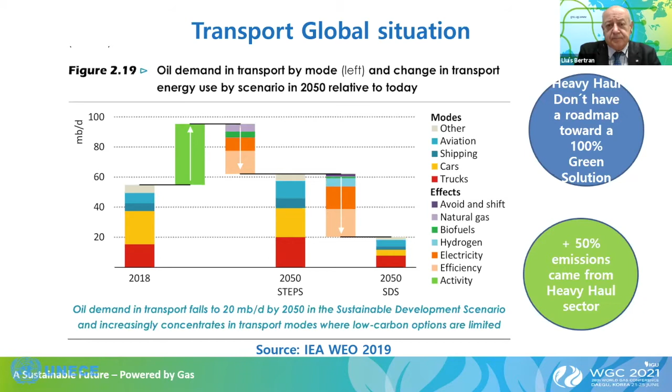Click again. So on the left, we talked about trucks, but also in the marine sector we are using one of the most polluting fuels, heavy fuel oil. So here the gains from switching this fuel to natural gas are very important and very great. On the right you can see the accumulated emissions related to pollutants in the air, a picture from 2015 when the Paris Agreement was signed, and you can see that what we have accumulated in our atmosphere comes almost entirely from other fuels.

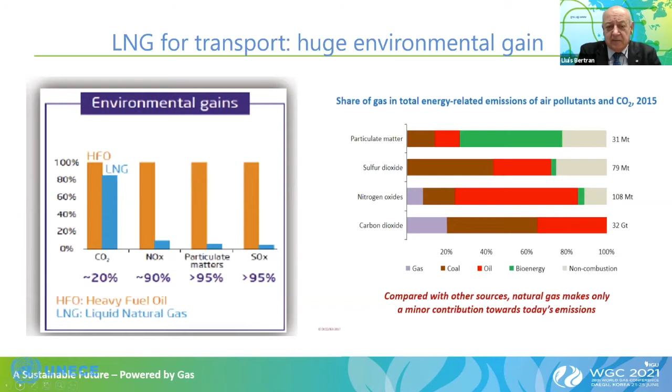So in marine transportation, you know that we have these ECAs as areas free of pollutants, which are currently in the North Sea, the Baltic area, and North America. But these areas will be extended. It has not been decided yet, but probably the next area will be the Mediterranean. And that is because, as I said, heavy fuel is really one of the most polluting fuels that we can use, even though the Mediterranean is still not declared an ECA area.

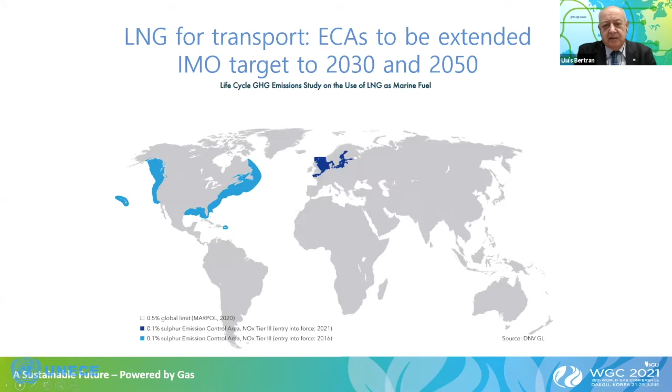We also have the International Maritime Organization targets for reducing pollutants, and setting up these targets for 2030 and 2050 is inviting all the shipbuilders to provide solutions today that can meet the 2030 target. Investments in shipping take around 20-25 years. So what we will have in 2030 and likely in 2050 needs to be done now. Move on to the next slide, please.

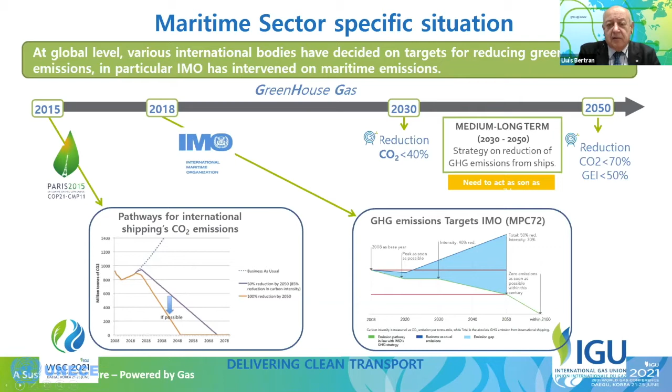A picture of what these International Maritime Organization goals mean: we cannot meet the Paris Agreement goals without having a plan. The IMO set targets of reducing CO2 emissions by more than 40% by 2030 and around 70% in 2050. To make that possible, different technologies can compete, but gas is now available as the fuel of choice for new-build ships that will be crossing the seas in the coming years. Next slide, please.

Among different technologies, it is demonstrated that LNG is nowadays a competitive and widely available fuel around the world for reducing marine transportation emissions and improving the air quality in these areas. It's commercially viable and scalable. We can move from smaller scale to bigger ships, and it could be provided in different harbors around the world. Next slide, please.

And the infrastructure needed for that is growing and growing. Europe is taking the leadership of this growth, but nowadays there are many initiatives around the world, mostly in Asia, where marine transport is key for moving goods and food around the world, for developing this technology and the infrastructure which is needed. Next slide, please.

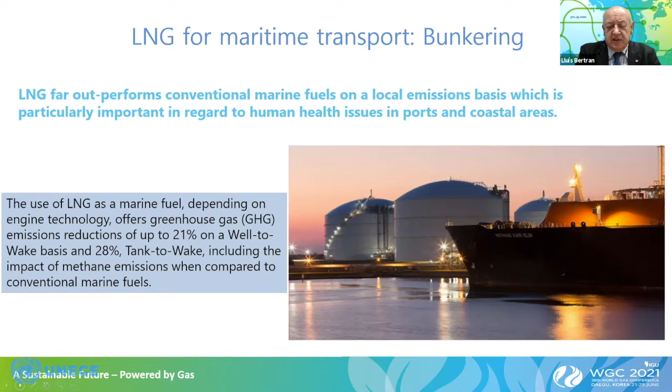Here I have very good news to tell all of you. LNG, natural gas, can come not only from natural resources, we can also have renewable resources. Here we have synthetic methane, liquefied synthetic methane, and biomethane. Both can be obtained, and the technologies are now being developed, and they could replace the normal LNG that we are using today. That makes our pathway to future decarbonization scalable, available, and with the capacity to modulate the change and the use of biomethane or synthetic methane that could replace normal natural gas.

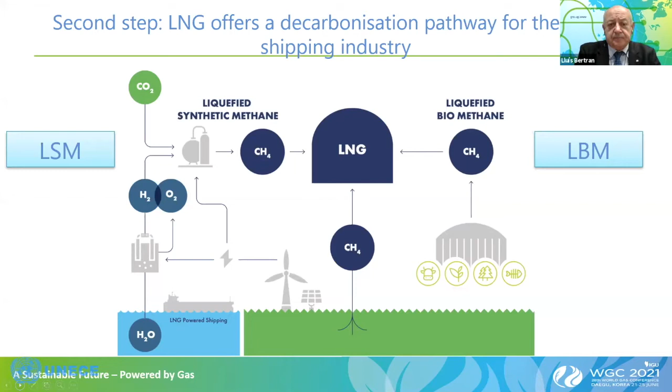And here we have also an idea on the supply of this synthetic methane and biomethane. So we can fully support and fully fuel the transportation sector with synthetic and biogas sources. And when other sectors also need to use more natural gas, not from an organic source but still renewable, we still have capacity for deploying another technology which is arriving nowadays everywhere, which is carbon capture, storage and use. So CCS and CCUS will allow the natural gas industry to continue decarbonizing after putting biomethane and synthetic methane on the road.

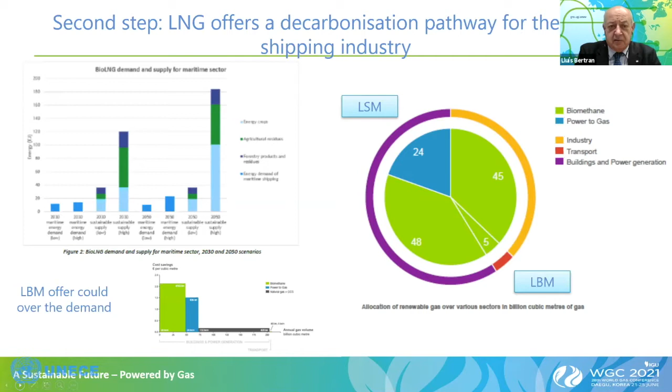So that means that we have a path for having natural gas not only as an enabler of the energy transition, but also a facilitator of the final destination of our targets. Next slide, please. Well, I will skip that. If you'd like to know a little more about what IGU is thinking, proposing and presenting on LNG activities for the marine transportation sector, you can get this report for free on the IGU webpage. And next slide, please.

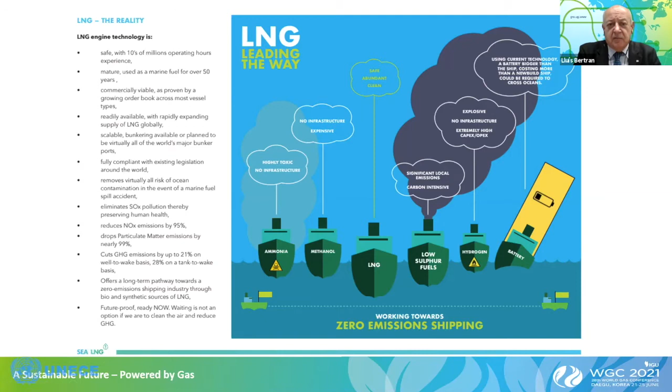Thank you, Mr. Bertran. It's very interesting, very illuminating. I think these lessons learned in marine transportation will be very applicable to road transport. And there are a few questions for you if you would like to take some of them. One is from Mr. Indrebo. I'm reading the chat, and I encourage others also to use the chat to the extent possible to ask all of our speakers directly.

The question is, as shipping seems to be growing, on road transportation, what is the interest from car manufacturers for NGV, for natural gas vehicles? Well, it's again this, because it's available today and is competitive in terms of price. We are now thinking about how we will be recovering from the economic crisis that the pandemic is creating, and we have an available fuel, scalable and possible to use today with environmental gains and economic gains from now. And now it's time for action on that.

Okay, thank you. And I have a question myself. We heard from you a lot about the lessons in maritime transport. This project at the same time deals with the use of natural gas as a fuel in road transportation. However, there is an interesting field of potential action in the future. As you probably all know, UNECE has the Inland Transport Committee that has a mandate for inland waterways, rivers in other words, and canals, rivers like the Rhine or the Danube or other navigable rivers.

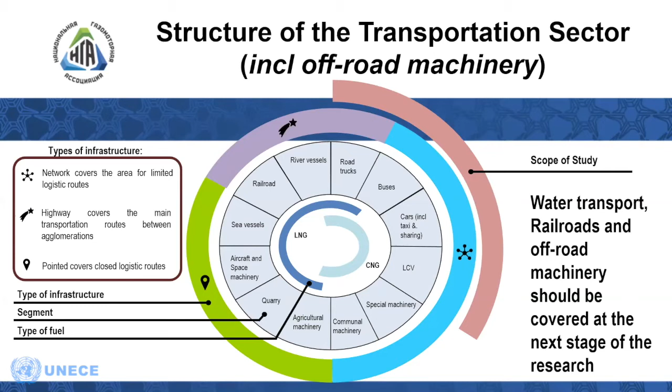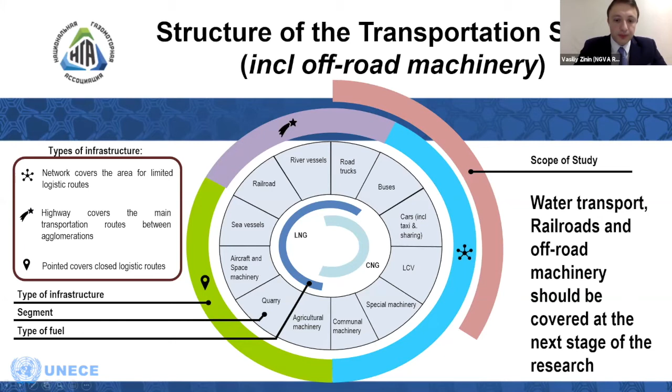Thank you, Mr. Zinin. Very informative, and thank you very much for giving us some information about the deliverables of this project. And I would like to encourage everybody to get in touch with Mr. Zinin, who is a consultant hired to help us deliver on many important deliverables of this project. Are there any questions for Mr. Zinin?

I have some questions. I sent you. You can say it because I have not received, please. Okay. Well, hi, Vasily. I hope you're fine.

Maria Rosa, thank you very much for your question. Dear colleagues, if you don't mind, I will answer in English. You know what situation we have now in Russia? We really have a great complex program for the NGV market in Russia with a lot of support from the federal government and regional government as well.

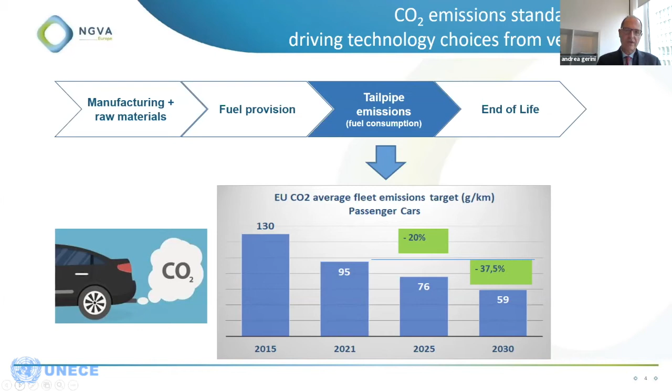If we move to the next slide, I think this is an interesting exercise made by Frontier Economics, looking at the potential we think we have when we switch from conventional fuel to battery electric vehicles. You see here on the left, 124 grams CO2 is the average value in Germany for conventional fuel, which theoretically could be completely cancelled. But when you add all the other components, the production of electricity, the CO2 impact of the infrastructure for electricity grid transmission, and the impact of vehicle production and end of life, you realize that out of these 124 grams, in reality, you save 7 grams.

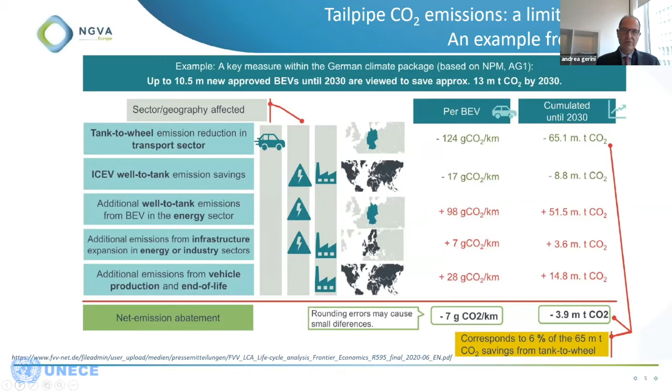So the real impact of a very huge electrification of the fleet is not leading to the expected result we could see just looking at the tailpipe emission; it's very poor. So we need to multiply solutions. And if we move to the next slide, we see the situation when we compare a C-segment vehicle, let me say a Volkswagen Golf, over a lifetime of 160,000 kilometers. We compare the emissions from petrol with CNG, and the perspective we are developing in Europe with bio-CNG, and also today's battery electric vehicle and what it could be in 2030 according to different energy mixes.

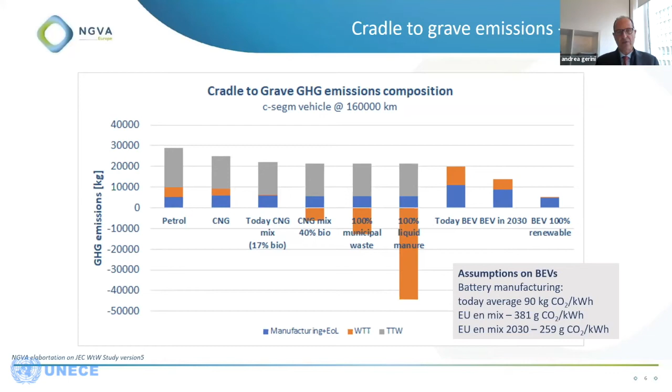So the blue part shows the weight of the manufacturing process. And here is the main issue today for battery electric vehicles. Today, battery electric vehicles emit double the CO2 due to the manufacturing process of batteries. And it's quite crazy to see that in a large sedan or big SUV, we are speaking about 100 kilowatt-hour batteries that just for their manufacturing emit approximately 9 tons of CO2 before starting to use the vehicle. So here is the question of the impact of looking at the system from a tailpipe approach rather than a more complete and overarching assessment.

If we move on to the next slide, we will see the overall result in terms of the so-called cradle-to-grave emission. And we realize that CNG is already providing a step in the right direction. And with CNG blended progressively with bio, we are able to provide the same kind of result as a battery electric vehicle at a lower cost, with a better vehicle range. So better meeting the expectations of the end user, because we have to consider them. So it's not a question of saying battery electric vehicles are bad and the rest is good. It is to really have the clever and right approach, to put the right solution in the right place.

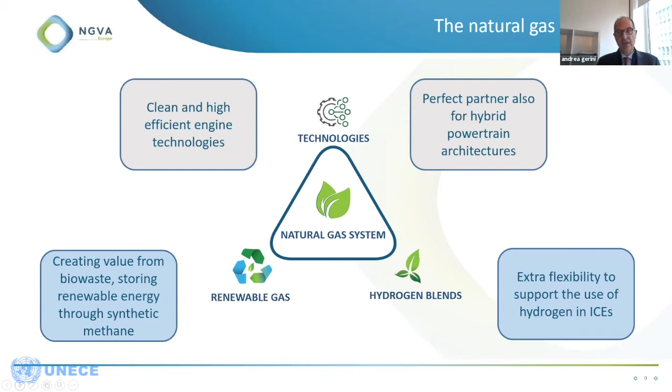Thank you very much, and happy to take your questions. Thank you, Mr. Gerini. I think this was quite interesting. You brought some important concepts. So let me ask, first of all, participants, any questions for Mr. Gerini? If not, I have actually one question.

When we started this project a year ago, we put in the project a construction we call well-to-wheel, from production to driving. And thanks to your intervention, and others were also involved, we changed this to life cycle analysis. I know your presentation said most of it, but could you summarize for us, for the sake of our participants, the key difference between well-to-wheel and life cycle analysis?

Yes, well-to-wheel is related to the utilization of the fuel, including also the production of the fuel and its distribution. So when it comes to natural gas, you look at the CO2 impact from extracting, processing, and distributing gas up to the station, including the compression of the gas up to 200 bars, or in the case of LNG, the liquefaction process and distribution. And of course, you add this to the CO2 emitted from the vehicle.

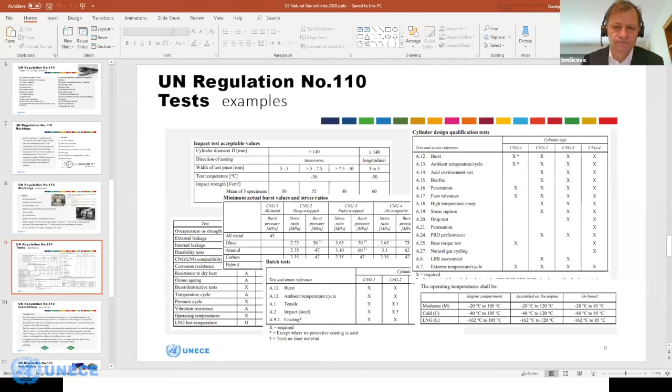Thank you so much, and thank you for inviting me to this important meeting. And please apologize for my late arrival, but I was in parallel in another meeting where I was a member of a panel and had to intervene there. So let me now go to my agenda and to my presentation.

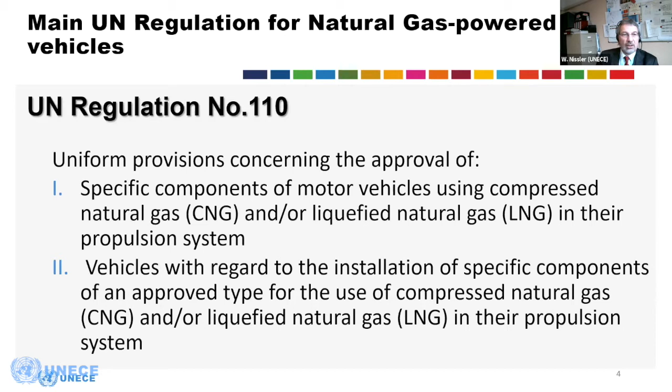Now let's move on and first look at the first part of the regulation that is dealing with the approval of the specific components, and which requirements these systems would have to meet. So we are dealing with pressures starting at the low pressure level of 20 kilopascal up to 26 megapascal. That means a pressure of 260 bar in the storage system of these vehicles with compressed natural gas. We also have to deal with very low temperatures, which is important for the liquid natural gas. So we are dealing with temperatures below minus 40 degrees Celsius.

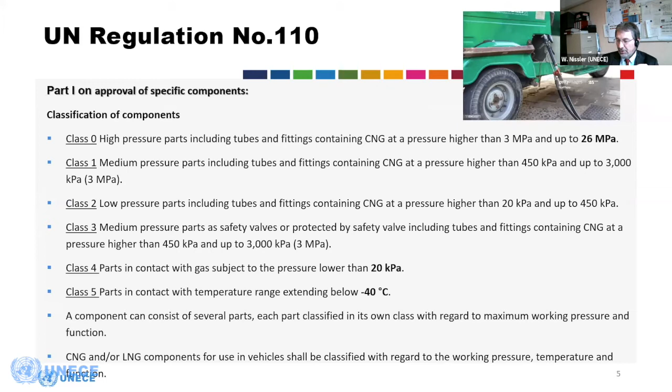Just as background information on this short image, you see the most common public transport vehicle in India, the so-called tuk-tuk, and India did an excellent step 2 years ago that all these tuk-tuks had to be retrofitted to run with compressed natural gas. So this was a huge step. And if you look at the population of vehicles in India and specifically the millions of tuk-tuks around, this switch was a huge step for the environment. Next slide, please.

This is just listing up of the specific components that are subject to individual approval, and if you count them, it's easily ending up at 26 different specific components that are covered in this regulation for individual approval.

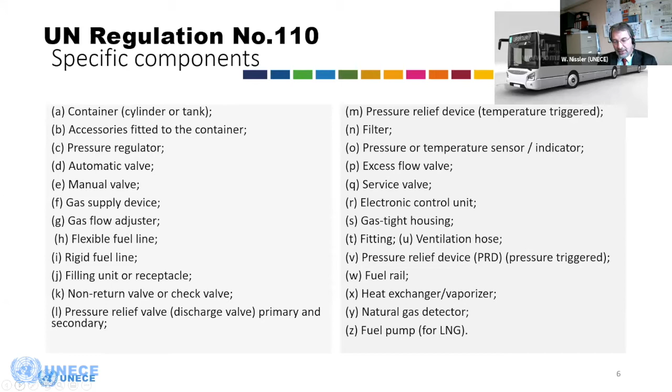The next slide, please. And therefore, all these parts will bear an individual approval mark, with specific elements on it. For example, I just put the example on the operating temperatures, where we differentiate between moderate or cold temperatures, and this will then be easily identifiable in the approval mark.

Very important also for keeping the systems safe during the life cycle of their use is that, for example, elements such as flexible hoses also bear a manufacturing date on their covering, so that those flexible hoses that have, let's say, a shorter lifespan than other parts of the vehicle can be checked whether they are still compliant with the duration of their use.

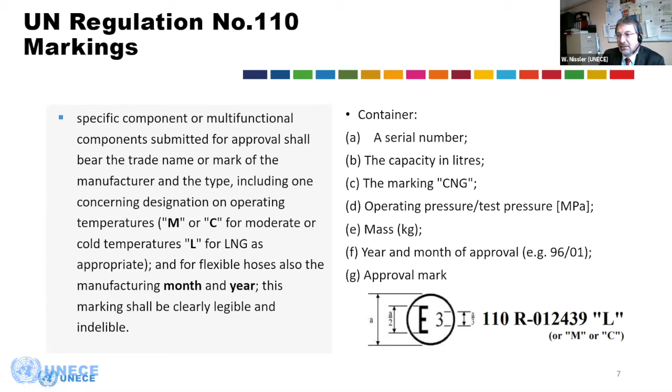Of course, very critical elements are containers and tanks, the storage media that need to have specific marking or a type plate affixed to them, and these containers and tanks need to be not only subject to a visual check during the periodic technical inspection, but also to be re-approved regarding their pressure or strength capacity, depending on their size, every 10 or every 15 years. Next slide, please.

So there are, of course, different materials that can be used for these tanks that you may find in the vehicles. So we have, starting from metal based tanks, as you can see in the image of the truck, up to, let's say, composite or wrapped materials, as you can see in the tank of the passenger car on the left image. Again, a lot of information is to be put on these approval and identification plates of the tanks.

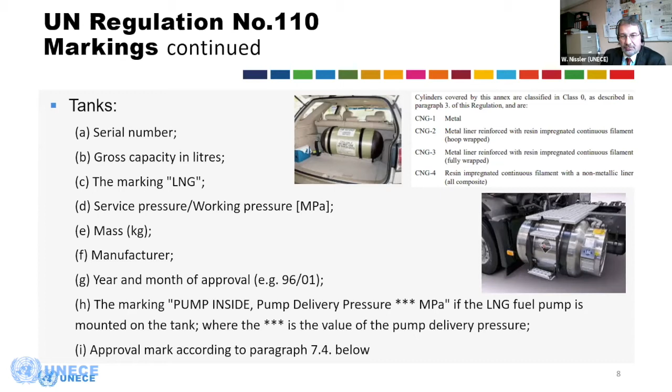Next slide, just very brief, and I don't want to go into detail. The regulation covers an extensive amount of test procedures and test requirements, and there are different matrices for the different products, showing which tests they have to comply with. And you can see that, for example, for some of the requirements, the burst tests can go up to 73 megapascal. That means 730 bar pressure that these tanks would need to cope with.

And also looking on the temperature side, operating temperatures are going down to minus 162 degrees Celsius. So there is a huge variation of tests that are specified within the regulation. Next slide, please.

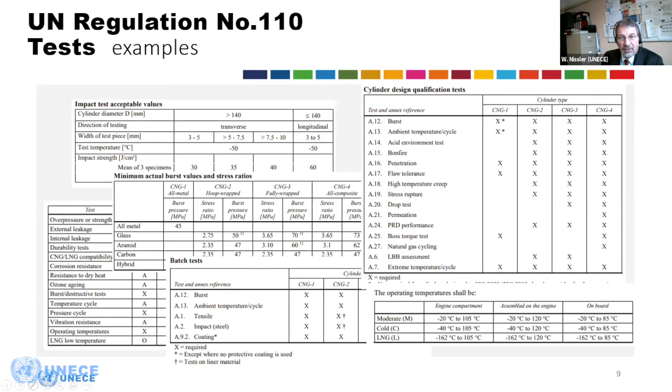So for the installation, there are some basic but very important requirements: these CNG or LNG systems of vehicles shall function in a good and safe manner at the working pressure and operating temperatures for which they have been designed and approved. And now it is also made clear why all the different components need individual approval, because one of the installation requirements is that all components of the system shall be type approved as individual parts or multifunctional parts. And of course, there are then requirements on the test of the installed system.

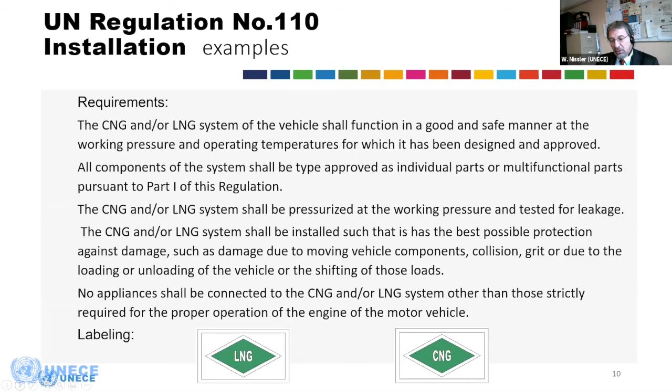And one important element is that these vehicles that have been equipped with CNG or LNG systems have the related labeling, which is very important in case the vehicle is involved in a crash, so that first rescue services know that there is some additional possible danger coming from these vehicles. Next slide, please.

The regulation also identifies the minimum parts that have to be part of an installed CNG or LNG system, and optional parts that may also be included depending on the individual system. I just wanted to put some images so you can see that from the vehicle manufacturers, for these vehicles designed to be CNG or LNG powered, all the components are already embedded in the vehicle in its design phase, and then they are very well installed and protected for crash situations.

Of course, you may also find some kits that are called CNG kits for retrofitting. These are popping up on the internet if you're looking for this. These are possible basic kits for the retrofitting of CNG systems. However, this retrofit is something that should be done by qualified workplaces, and it is not something that can be done in a do-it-yourself manner. And if you are traveling around in several countries, sometimes you assume that there is more do-it-yourself than proper installation by professionals.

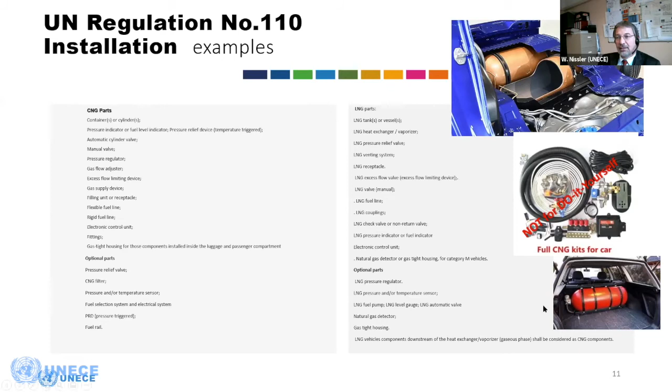Next slide, please. So there you can see, just for the installation of containers or tanks, the storage media for the compressed natural gas, that they should be designed to withstand a force comparable to an acceleration of 20 G, that means 20 times the weight of the storage media, in the direction of travel, and 8 G for the strength perpendicular to the direction of travel.

Just as some highlights, this is something that ends up having these systems installed in vehicles in a very safe manner. Of course, there would be many more elements in the regulations that could be shown, and there is, I think, a list of more than 2.5 pages with references to private standards like ISO standards, which are referenced within this regulation, therefore making these private standards mandatory

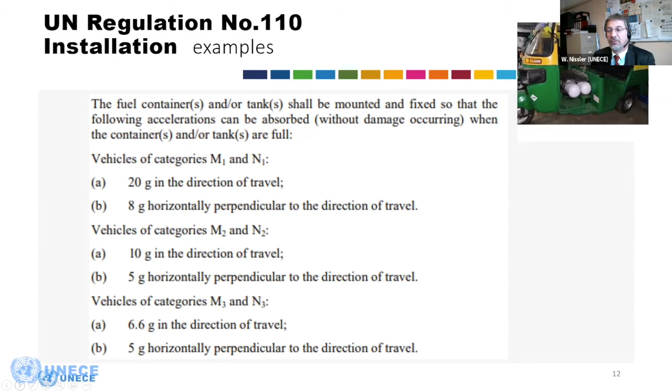via this UN regulation. And with this, I will stop here, so as not to go too much into technical detail, as it is a very technical substance, just giving you a brief look into one of our UN regulations dealing with the subject.

Thank you. Thank you, Mr. Nissler. Very, very interesting. Any questions for Mr. Nissler? If not, I have one.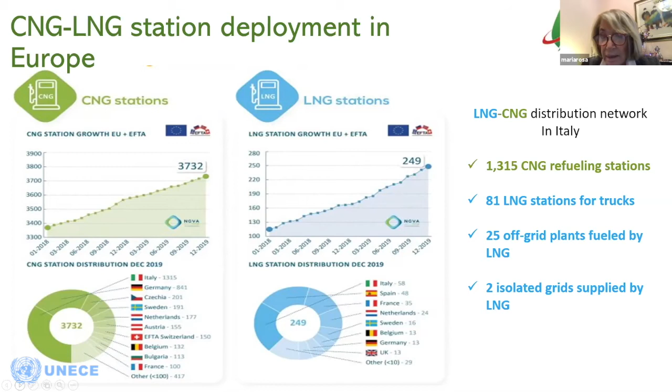bio-LNG stations. And just 2 weeks ago, at Iveco, a new truck was filled up totally with biomethane. And that has been a very big achievement. Of course, we are also looking to a mix of CNG and bio-CNG to clean up. We know that 30% bio makes 30% less CO2. So we are doing a very large project to give to the grid as much biomethane as possible.

Next slide, please. Well, Italy, as I say, has all the technologies for natural gas. We have small-scale LNG. We think that LNG is the transition for decarbonization. So we use this word, transition, and bridge to the future technology. We don't know what's going to happen. Maybe it will be hydrogen, electric. I doubt electric for heavy duty and boats, but hydrogen is coming.

So we are looking forward to make people understand, that stakeholders understand that natural gas is the best transition possibility for decarbonization. It's ready, we have all the technology, it's cheaper, and absolutely it's a technology that can stand against all the fuels like diesel or other fuels or gasoline.

So let's go. We have a micro liquefaction plant. We have gas pipelines all over. Right now, we are going to reach also Sardinia. Sardinia is the only place in Italy that had no CNG. So now with LNG, we are going to open a good grid of pipelines in Sardinia to cover it. And we want to be the hub in the Mediterranean for LNG, LNG for boats, LNG for ships.

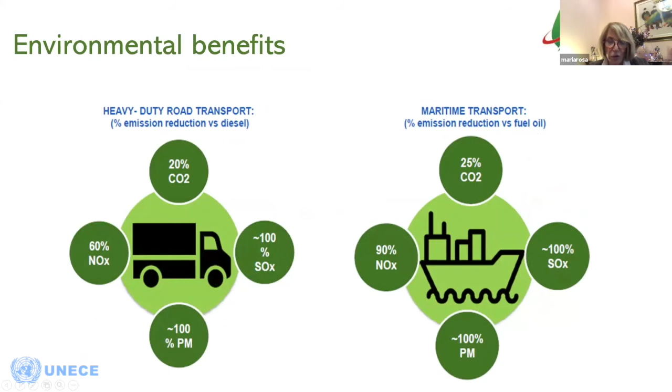I am Milanese and Venetian, and my dream is to see the Vaporetto in Venice go on CNG or LNG or bio-LNG. It's a tough job, but I'm working on that very hard. So I think that our stakeholders are working very hard to reach this point. Next slide, thank you.

So now we see the LNG uses and the potential. The main potential for LNG is heavy duty trucks, of course. The LNG consumption in 2018 has been 60 kilotons per year, with a growth of plus 100%. The expected demand is going to 800 by 2030.

We show the potential. Okay, also the maritime transport is growing very much. And Italy had the first boat on biomethane and bio-LNG. We have LNG for residential and industrial use. And we're working also on that to have a growth. Thank you very much. Next slide.

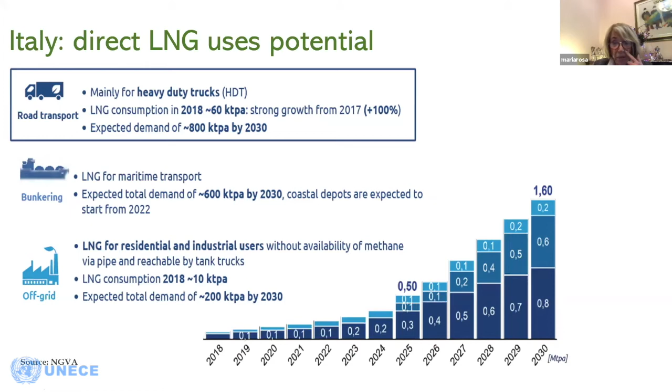Next slides. You see the other uses of natural gas, of LNG, and that's what we are mainly working on, because NGV Italy does not yet have the technology for big ships, but we have the technology for this kind of boats or this kind of ships. And we are already working in countries to have dual fuel, that means diesel CNG or diesel LNG, or changing the engine into Otto cycle, totally all LNG.

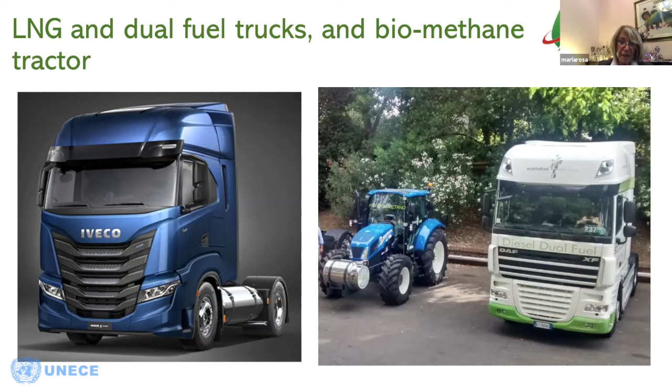Well, we're working also on trains. We are actually working with NAM on technology for trains. And in 2 years' time the first samples would be ready. And it's going to be the train that does the circle here around Lombardia and Veneto. And we think that after the LNG trains, there will be the hydrogen trains. But this is a technology that my associate members are carrying on.

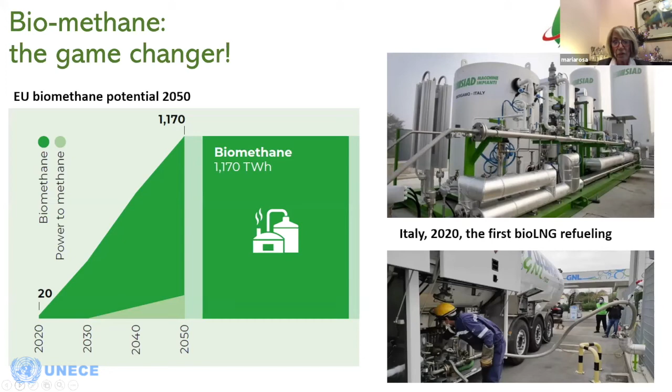Thank you. Can you go to the next slide?

So this is the potential of biomethane uses in Europe by 2050. You see that biomethane has as much potential as hydrogen. And we see that industry can use biomethane on a very large scale, giving lots of power to the companies, and transport will also benefit from biomethane LNG, because as I said, it's the cleanest energy that we can look at at the moment. And together with natural gas, we can achieve a very good decarbonization.

I want to mention that LNG trucks now, or biomethane LNG, are capable of running 1500 to 1600 kilometers without stopping. So that shows also an economic return, because you don't need to stop every 300 kilometers to refuel. And it is extremely important to have a very good network of LNG stations all around Europe and other countries. I'm trying to push Gazprom to open LNG stations in Russia, because we really need it if we want LNG trucks.

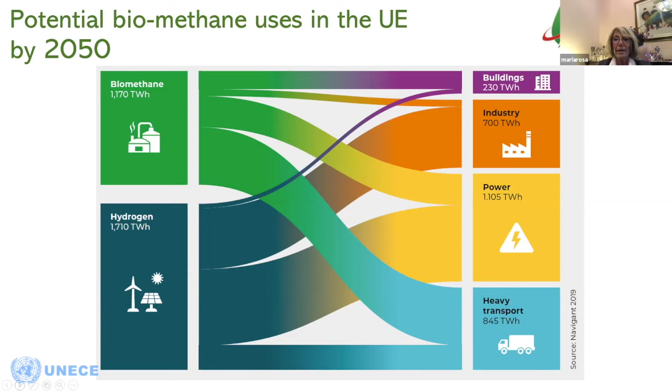Conclusion. So natural gas stakeholders, we have to join forces. I always say that I remember that 40 years ago, talking about LPG, people were mentioning the poor people's fuel. Also, LPG started in Italy before the Second World War, like CNG. CNG was even said to be not even the poor, but the gypsy fuel. I mean, something that nobody thought about because of the big tank and the difficulty of filling, and also the problem of security at that time, because of course CNG is high pressure.

But now we think that we can always be proud and say that we are really the best at the moment, the best for the transition to decarbonization. So I think that we need most technology neutrality. NGV Italy has been one of the most important partners in writing the DAFI, where technology neutrality has been stated very strongly, and unfortunately is not anymore so much with the Commission. But that's what we push. We want technology neutrality. We have nothing against other technology, but we want to have our own space.

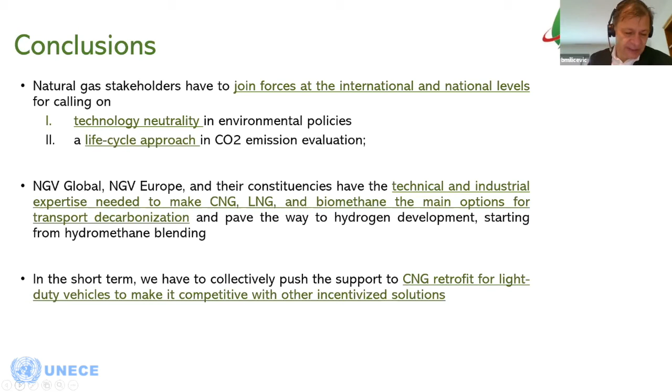Thank you. So we are now leaving, thank you again, the shores of Italy with all this LNG. And we are going to Russia to hear a case study from Belgorod Oblast.

Hello? I was there many times with the LNG truck with Mr. Zubkov in Belgorod. It was snowing. We could not even land with the plane in Belgorod. We had to land someplace far away. And we were there with an Iveco LNG truck, and Mr. Zubkov was there, and myself, to start the methanization of Russia. We were in Belgorod, we were in Rostov, we were in many others. So I wish Mr. Abramov a very good time. Thank you.

So yeah, this is a perfect segue to our next presenter, who, as I said, is coming from Belgorod Oblast, Mr. Oleg Abramov, the Vice Governor of the region, and he will tell us about the development of gas engine fuel markets in this oblast. Mr. Abramov, the floor is yours.

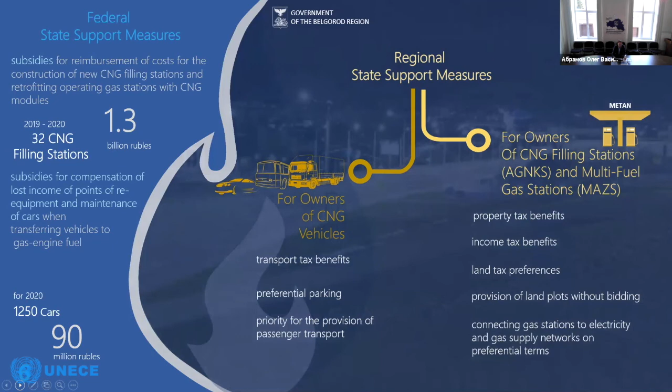Thank you, Mr. Abramov. Very interesting. Any questions about our case study from Belgorod? So I don't see any. I think you provided very interesting hope, so to speak, for compressed natural gas vehicles. As we heard in Europe, it's more and more difficult to grow the market.

And I do hope that this pilot case study from Belgorod Oblast will be applicable in many countries covered by this project. And I'm really looking forward to transferring some of those experiences to countries which are relatively small, closer in size to Belgorod Oblast than the Russian Federation. So with this, I think we will have to stay in touch and try to engage you in our future activities as we go next year in sub-regional parts of countries that are also covered by this project. So thank you again, and with this we move to our next and final.

May I say one thing? Yes, Maria Rosa, of course. Mr. Zukov, we traveled down south, the agricultural regions like Belgorod, Rostov, and so on, because one of the aims was also to try to make the transportation of vegetable and agricultural items less expensive. Because right now, if you travel with a truck of, let's say, crops, you pay as much as you travel with a truck full of very expensive goods.

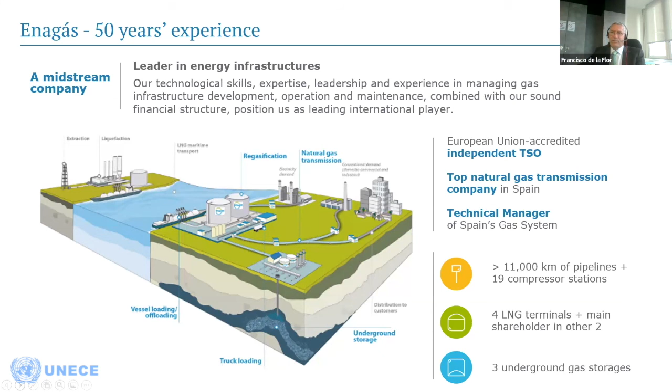LNG, just a historical reference. Due to the lack of domestic production and pipeline interconnection capacity with the rest of Europe, we had to rely from the very beginning on imports of LNG, so we had to develop import facilities located alongside our coasts to supply a big country, big compared with EU standards, not with the Russian Federation, of course. Once the Spanish natural gas market reached some maturity, we started to leverage our expertise to expand our activities abroad, notably in the LNG infrastructure business.

I will stay here only 4 or 5 figures, no more, just to set the picture on the worldwide LNG panorama, just complementing what Luis Beltran said before. Here I could take the IGU report or the GIIGNL. I will use here the GIIGNL. 21 exporting countries, 42 importing countries, 355 million tons of LNG traded, 600 vessels voyaging from liquefaction to regasification facilities, and I go to the point, LNG truck loading facilities in 18 countries, 50% in Europe, although China alone represents 80% of quantities, and together with Japan, 90.

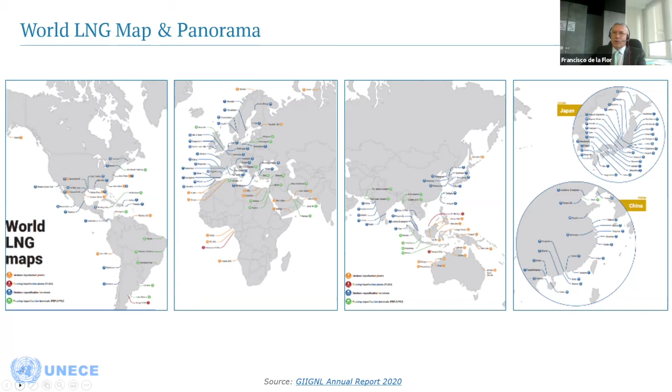Next, please. Truck loading. On truck loading, we had to rely, as I said, on LNG to start and expand the use of natural gas in our country. A relevant feature of our system is that at the same time the gas grid was built, reaching areas near the LNG import terminals. Some other more distant territories could also benefit from the use of natural gas in the industrial and residential sectors by supplying these places with LNG and on-site regasification in small satellite plants.

This week, I think yesterday to be precise, we celebrate the 50th anniversary of when the first LNG truck was delivered from the Barcelona LNG import terminal to Figueras, a small city located close to the French border. Next, please, Nadia. Here, all our LNG import facilities do have truck loading points.

The average loading in the past years is around 40,000 units, and since the beginning, several hundred thousand, probably 1 million. In 2019 alone, it accounted for 13 terawatt hours, loading 43,369 trucks. Next, please, slide number 7, right.

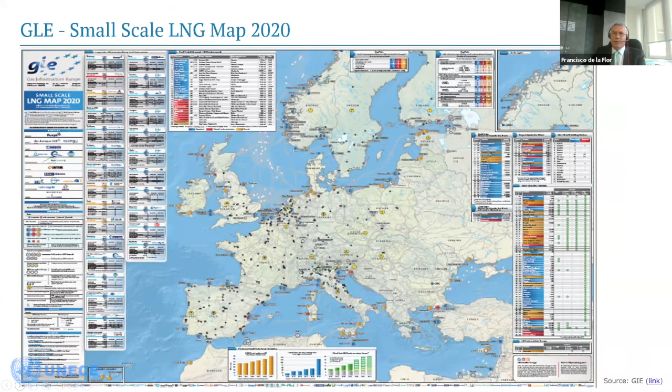And from now on, I will refer exclusively to mobility. First on road, I will be very concrete, not to repeat. Next, please. On the 28th of November, there were 71 LNG stations open to the public in the Iberian Peninsula, and 29 more projected or under construction. Heavy duty vehicles do have a quite significant network to fill their tanks.

I think that the chicken and egg dilemma, also referred to before, shouldn't be an issue here, provided that there are already a number of stations and new ones could be added if needed, because the number of customers increases accordingly. By the way, in many locations, the users can fill either with CNG or LNG. An interesting figure: in 2019, the number of gas vehicles grew twice as much as the number of electric vehicles. Probably it will be the last year or not. If only this trend could continue, it will show that the cost-efficient criterion is retained.

Not only the cost-efficient, but I will stress what Andrea Guerini said in his presentation on the full LCA analysis, and then probably if the authorities take into consideration this full LCA, the results would be quite different. Because you may be aware that if a car uses CNG, the total emissions, considering this full LCA, are lower than electric cars, considering a number of years, according to the chart mentioned and used by Andrea.

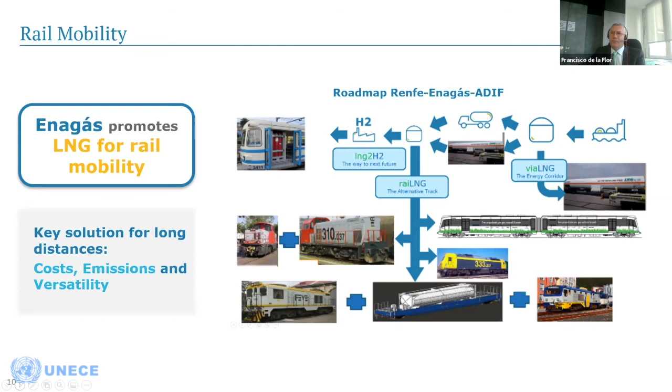Now coming to my favorite one, which is maritime mobility. As you know or guess, one big vessel consumes the same amount of gas as 20, 30, 50,000 cars. So the impact on the environment is significant. Every drop is important, and natural gas cars are important, but for me, vessels are even more.

We have a significant number of LNG imports and LNG storage facilities, alongside the cost and experience to manipulate this good. I'd say maybe 1 million loads in the past years. There is no doubt that the bunkering services can be provided easily. Several features are feasible and already provided: truck to ship, pipe to ship, and ship to ship. They are quite quick and safe operations.

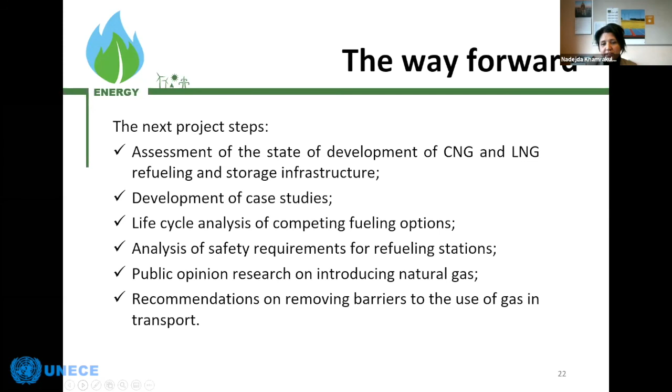So I will not go into further details due to the time constraint, but you see on the slide that we will have a number of different activities that are previewed for at least the first half of next year. What will happen after? We will definitely organize an event to disseminate the results of the studies and analysis that we are going to undertake.

Further on, we also very much encourage you to provide your suggestions, to provide your feedback on what would be the actual interest and the topics to discover further. Today, during discussions, we had already a number of interesting suggestions, and I personally noted them, and I believe that in the due course of the implementation of this project, we will try to address those suggestions and interest in going deeper into certain aspects of the increase of the share of CNG and LNG in the transportation sector.